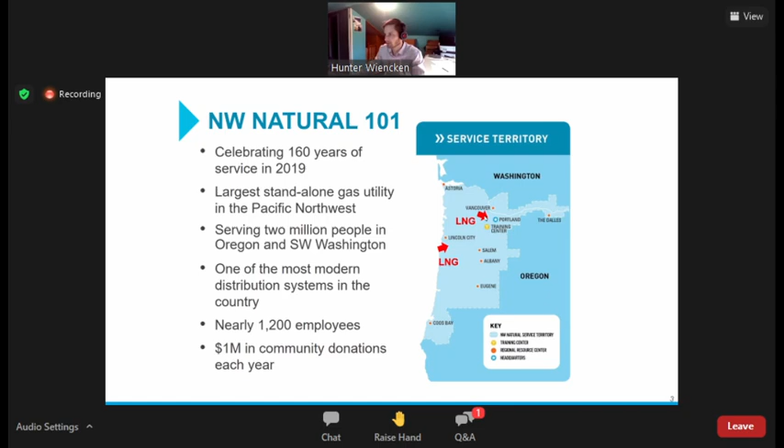We then added another LNG plant in 1977, in Newport, like I mentioned. It's a larger plant. It was newer, obviously, so it's a little more advanced. This facility was actually originally meant to import LNG, but that never came to fruition. I think there was an issue with getting ship traffic to the site. Nevertheless, it was built there, and we use both the sites today.

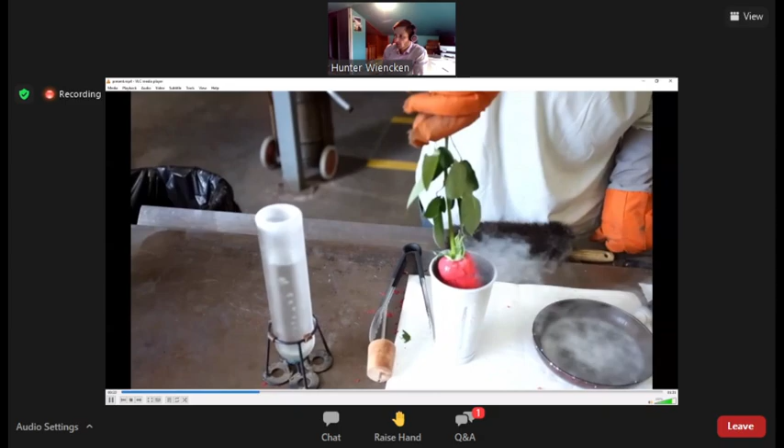Here's an operator at Newport LNG, and he's just gonna show you how this is not as cold as liquid nitrogen. I think probably in your science class you may have had someone show you what liquid nitrogen does when you freeze stuff, but nevertheless, negative 260 degrees is still pretty cold, and you can quickly take a rose and freeze it and shatter it.

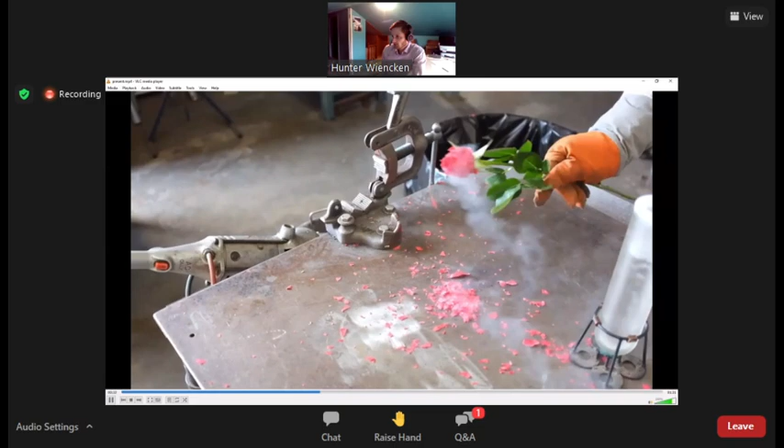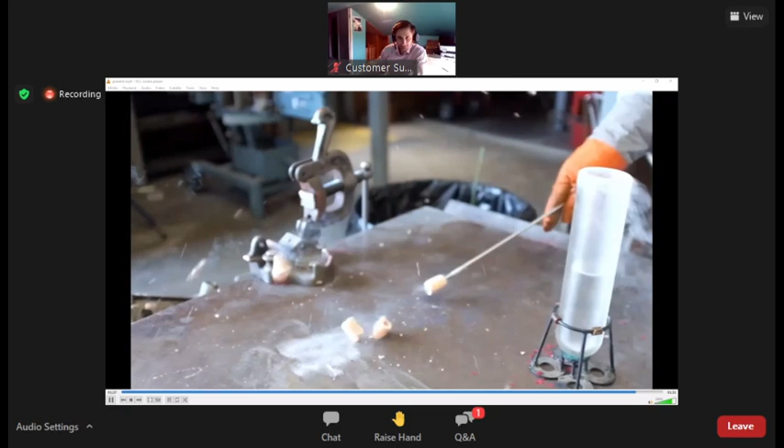We'll do a hot dog for funsies here. And so you know how when you boil water to make tea, what's happening here is once you put that hot dog in the LNG, it's actually boiling. It just has a much lower boiling point than water, and so there you go.

So why do we have natural gas or LNG as a utility? So Puget Sound Energy, they're providing natural gas to fuel vessels. And if you've paid attention to political news, there's been talk of LNG down in Southern Oregon on the coast, and that's actually to export LNG. But so we're a utility, and just any guesses on why a utility has LNG?

I don't know if this works. Can they message through? So you guys, let me see if I can turn this on for you. All right, I just turned on the chat for you guys. So if you want to put in some words in the chat, if you want to ask your question again.

Yeah, so why do you think Northwest Natural has LNG sites? Any guesses? Thoughts? Okay, no thoughts. Well, so think about what happened in Texas recently. Oh, I think we have some coming in. I think they were typing. There you go. Do you see the chat? Yeah. This is great.

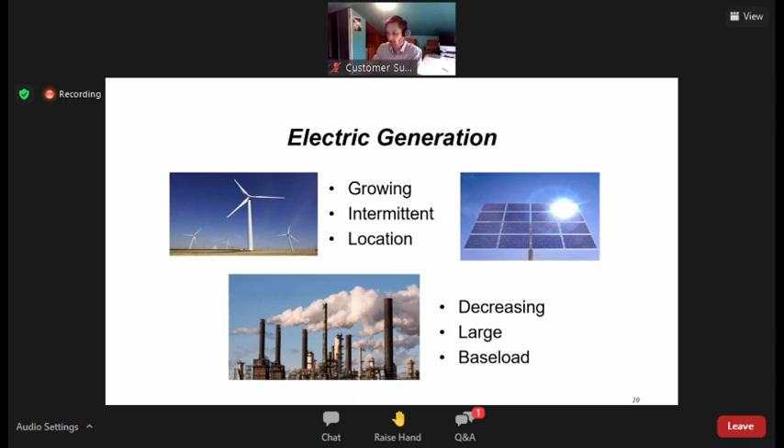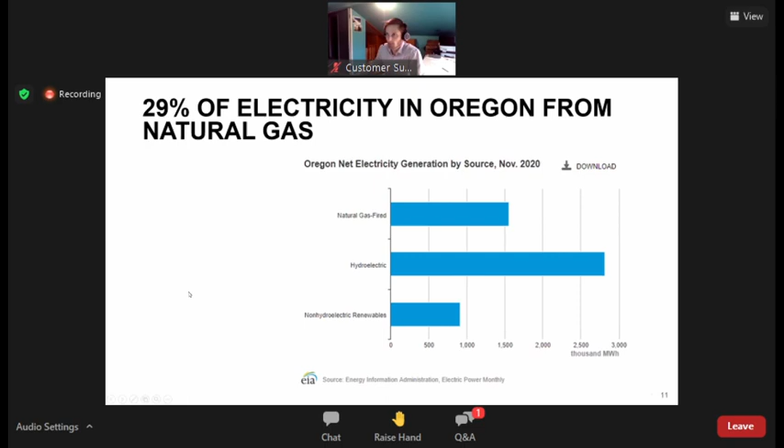And now we're sort of allowing the demand to ebb and flow based on wind and solar and hydroelectricity. And then we just ramp up and ramp down the natural gas to fill a gap. And as a whole, we end up producing a lot less emissions. And in the state of Oregon, I think they've closed any last coal plant at this point. So I don't think a lot of people realize it, but in Oregon, like I said, 30% of electricity is coming from natural gas. So that's why it's important.

Oh, do I get a Q&A? Let me find the right button. Oh, did I miss that question? Oh, for what job? For my job? I'm assuming.

Well, I'm a mechanical engineer. I went to Washington State University and learned engineering, and then went into consulting and learned how to build all this stuff. And so you need the technical skills in engineering, and then you need a lot of general engineering skills, which I'm going to show you in a minute.

So hold that thought. Outside of engineering, which I didn't plan to talk about, a big area is communication: writing well, speaking, putting presentations together. That's very important. And if you get opportunities in school to practice that, I highly recommend it. So that's my quickie on it.

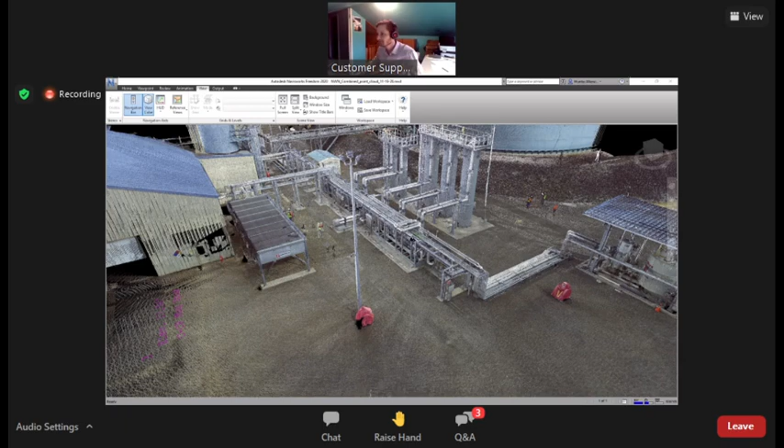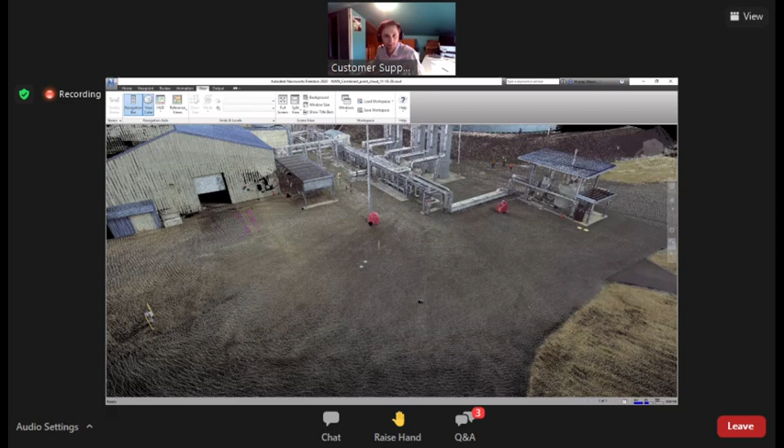So if you can chat still, if it's allowed, I'd like to see some guessing. While you ponder, I'm gonna bring up a little view here. All right. Oh, the question was, let me think how to frame the question clearly.

So ultimately, LNG is this liquid at negative 260 degrees. And before that, it's gas. And we need to clean the gas and remove certain components before we go down to negative 260 degrees. Why do you think we're doing that? What do you think we're removing? Why do we need to change the gas before we liquefy it?

Okay, so let me scroll up. No discrepancies in it, kind of, yeah. Is easier to treat as a gas than a liquid. Yeah, that's kind of true. Some of the things in the gas could potentially harden, some particles, exactly, Mackenzie. It's still going to be flammable.

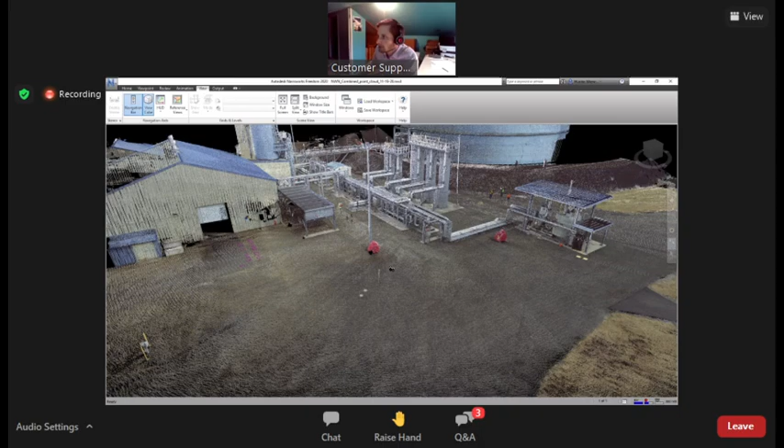Yeah, and particles that we want to get out of there. So I think, Mackenzie, you were the closest. The main thing we want to remove, okay, and so by the way, we're over at a corner of the facility. I got a scan. Unfortunately, my contractor didn't get me the entire plant for you guys.

But this, can you see the little hands? Can you just nod? I forgot your name. Anyways, so

Gas comes in and yeah, so we want to remove things. So we're going down to negative 260 degrees. So we want to remove whatever's going to not be a liquid. And so that would be water, which is obviously going to turn into a solid at 32F, and CO2 is another contaminant that's often in natural gas, particularly if it's coming from the Rockies. And CO2 wants to, I think, turn into a solid at negative 150. You know, like when you buy dry ice at Freddy's or whoever your grocery store is.

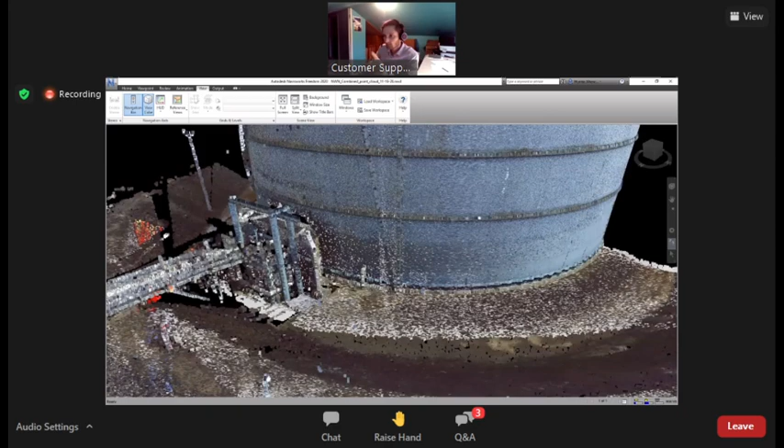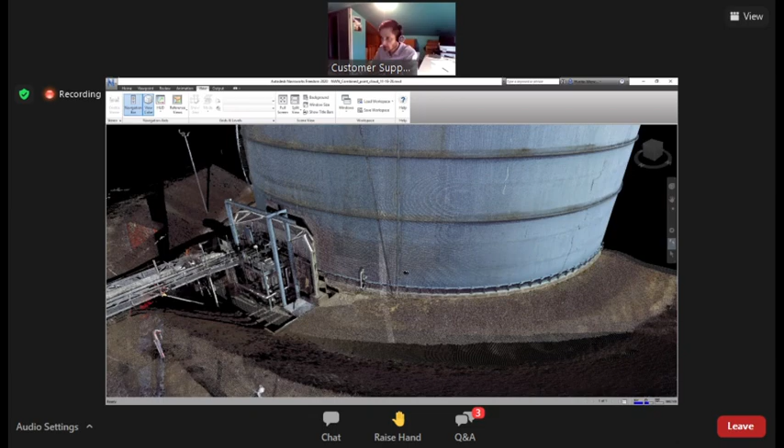So we want to get those items out, because if we try and turn it into a liquid with water and CO2 in there, the system can't run. It freezes up. All those particles get stuck all over our exchangers. And furthermore, this whole huge tank over here, they all pile up in the bottom of the tank because everything in here is negative 260 degrees. So if there's water and CO2 in there, it sits in there forever. So we want to try and get all that junk out of there.

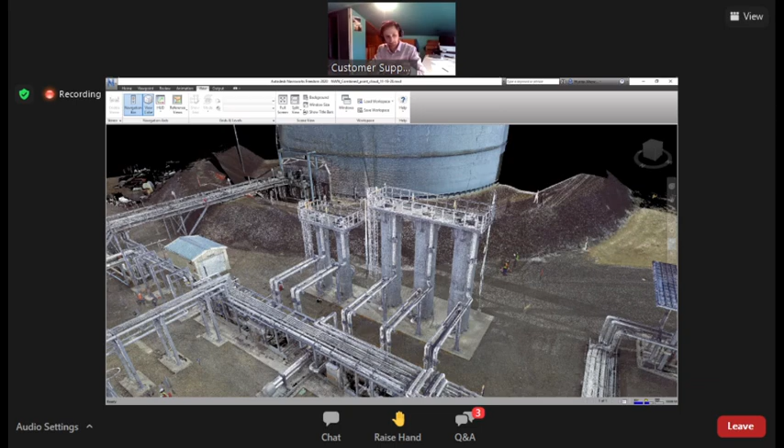And how we do it is we got two processes. We got these exchangers on the left and these vessels on the right. And the first ones are used to remove CO2. And how it works, if you've ever seen, well, I'm sure you've seen it. You know, if you got a shoe box and you get the little packet and it says like, poison, do not eat, that's got desiccant in it. That's got these little balls in it. And they put it in there to pick up moisture so your shoes are fresh and clean when you get them, and so it keeps the humidity down in that little box.

Well, these vessels, and that's called molecular sieve, these vessels are completely full of that stuff that you find in that little packet, 30, 40 feet tall. And each of those little balls, these little ceramic balls, are meant to pick up the water or the CO2, and they're specially formulated so those CO2 molecules fit just right in the little nooks and crannies of that ball and get caught. And so as gas flows in, this gets filled with CO2, and then clean gas flows out, and then it goes into the next vessel, and then that gets filled with water, and then that goes out, and then you got clean gas, and it goes over to the liquefier.

Okay, so now one more question. If you want to answer, I'll pause a second. How do you think we get the CO2 and the water out of these vessels once it's all full? We got CO2 in one, we got water in one, clean it out of the gas. How do we get that stuff out of there now? Any ideas? Because we can't just keep filling it indefinitely, right? Okay, Mackenzie, you did pretty good. What do you think? Right on.

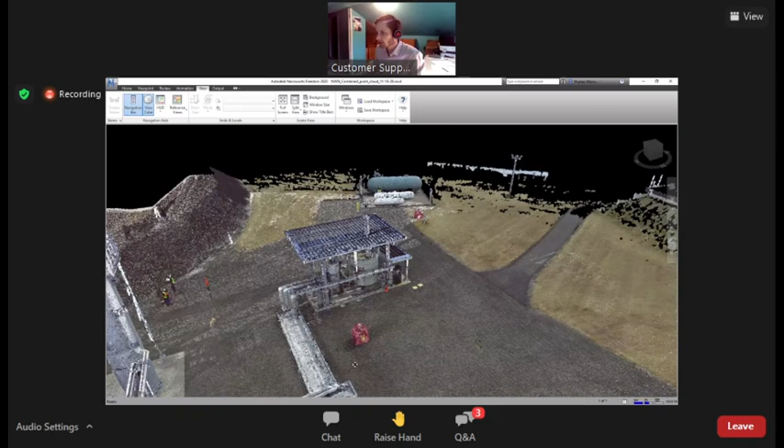And I realize I'm at 25 minutes if someone's worrying about time.

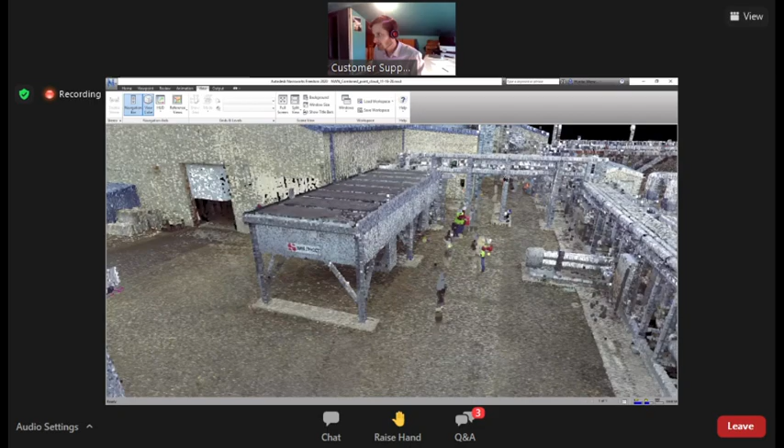This thing you see over here, it heats up hot oil to 600 degrees. That hot oil goes over here to some heat exchangers. And then we take gas, run it through the heat exchanger. The gas goes up to 600 degrees. And then we take that gas and we run it through one of those vessels once it's full. And then those little beads release the CO2 and the water. It all gets released. It's flowing out of there.

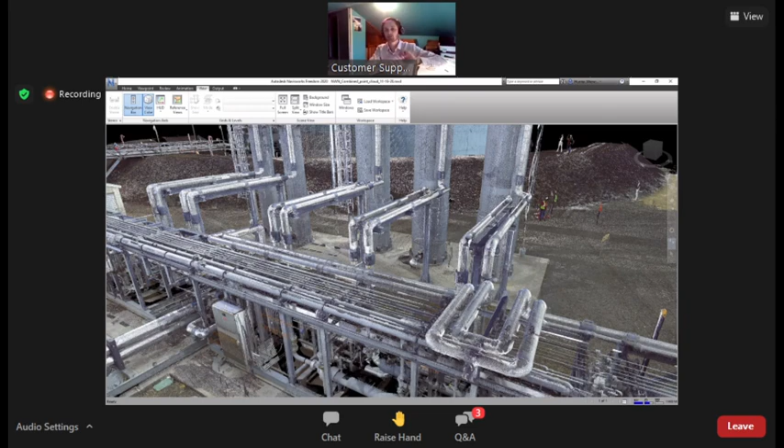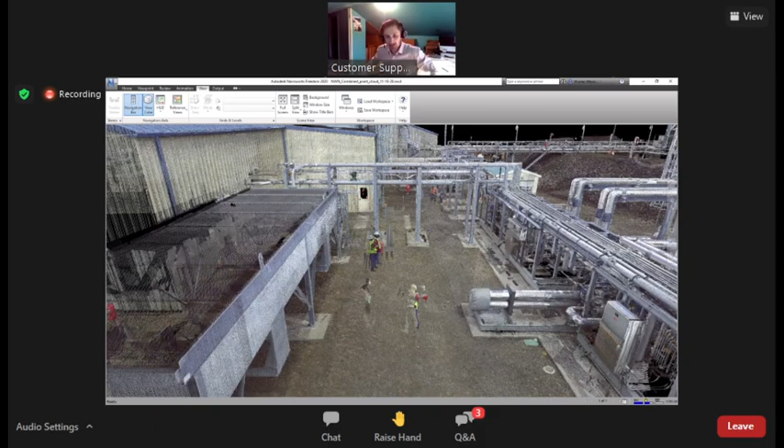And then we actually use that CO2 and water that's now being carried with natural gas, and we burn it in a turbine on site, exact same technology that they use to make electricity, but we use all that energy to run a liquefier, which I wish I had the scan from the contractor, but so we heat up the gas, run it through these vessels, everything gets released, we burn the gas, creating not electricity in our case, but compression, which I'll explain what that's for in a second.

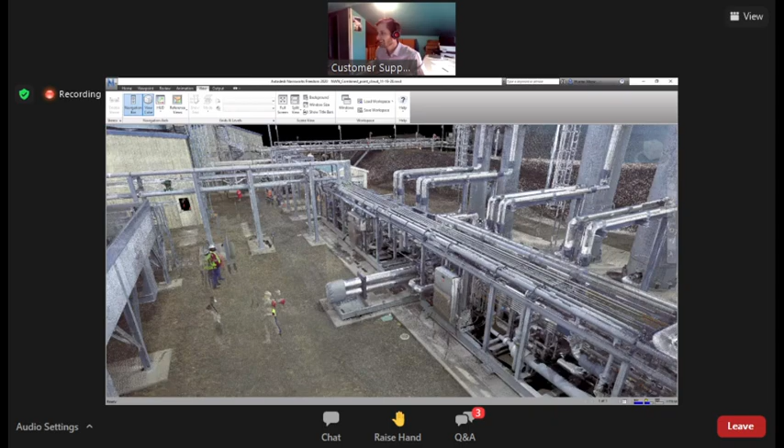And after we do that, running the gas through these vessels hot, we then cool it down and they're ready to go, ready to absorb more CO2 and more water and repeat the process. And that's why we got two. We can have one regenerating and we can have one absorbing. And we have three of these other guys for CO2 because we have 3 steps: absorbing, regenerating, and cooling.

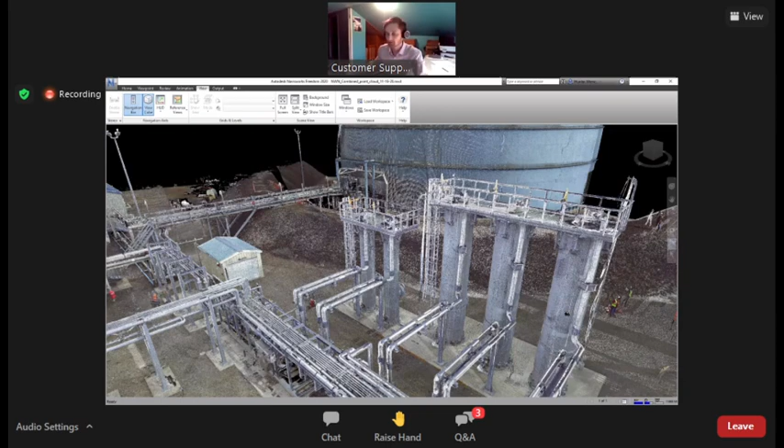Okay, that was fun. Maybe fun for me, I don't know.

This is what the process flow diagram looks like. Don't know that I really want to get into it too much, but this is where that gas flows in. This green box is where all those vessels were. Some really good guesses on how that worked, quite impressive. And then the gas leaves all this rigmarole, flows over here, and it goes through some heat exchangers.

Don't really have a good way to show you this because it's like 30 feet tall, can't exactly take a photo of it. But these little squares here, they're like a radiator, same kind of construction as the radiator on a car. That aluminum thin material with passes going through it. So the gas goes in one side and gas goes in another side, and it heats and exchanges, and eventually comes out at negative 260 degrees and goes in the tank.

That compression I mentioned is going on over here. And so all that waste from all this stuff is going over here. It's running a turbine, which then compresses refrigerant and creates a cooling effect, just like the AC in your house, if you have AC in your house or your car.

So that's all I had for the process, which, Olivia, hopefully that's not too much of a bummer for you. But hopefully it's better than Puget Sound.

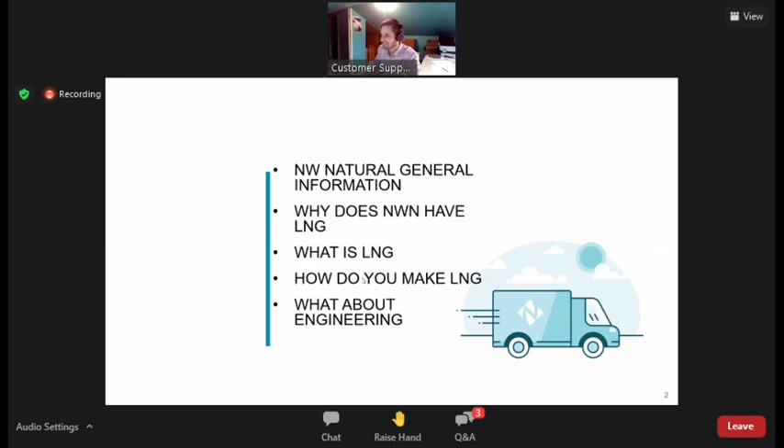So how am I on time? When's the normal wrap up? Do you know? It was scheduled for an hour on our side, so right now we're about 35 minutes in. Okay, they told me to keep it to 20 minutes or something before, so okay. I'm failing at that, but I won't take an hour. How about this? Everyone who's listening in, raise your hand if you have 15 more minutes at least. You'll have an audience of 3 in 15 minutes.

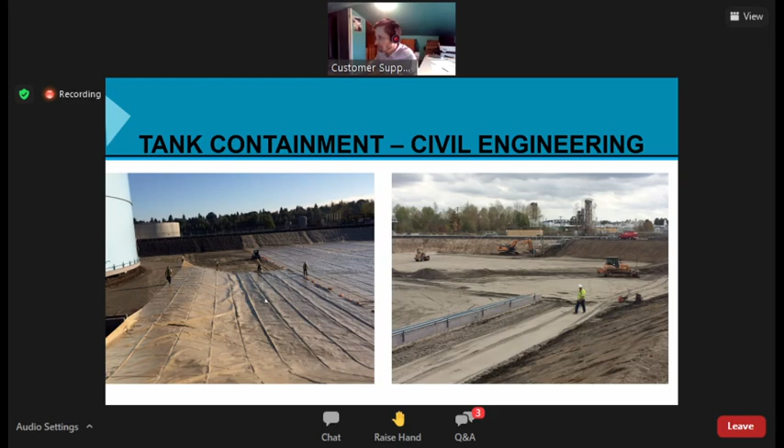Okay. I'll punch through. So geotechnical, so this is the study of the rock and what the ground's made out of. This is a project at Newport where we needed to put new equipment in, and the ground there is sand. So over time, engineering-wise we have to build things to the current seismic code, which is meant for the big one, the big earthquake.

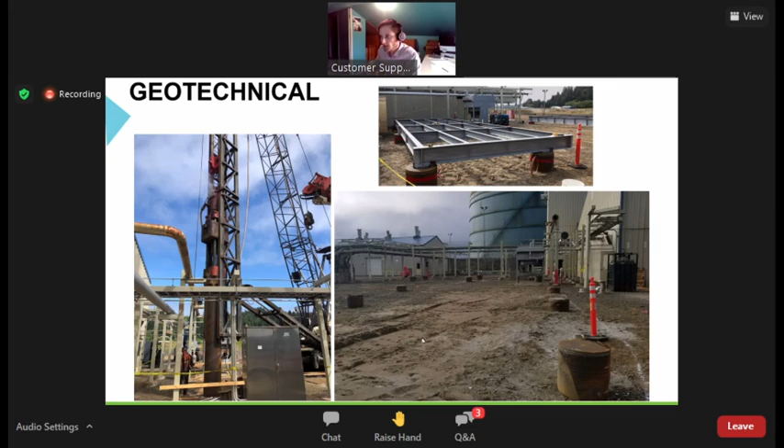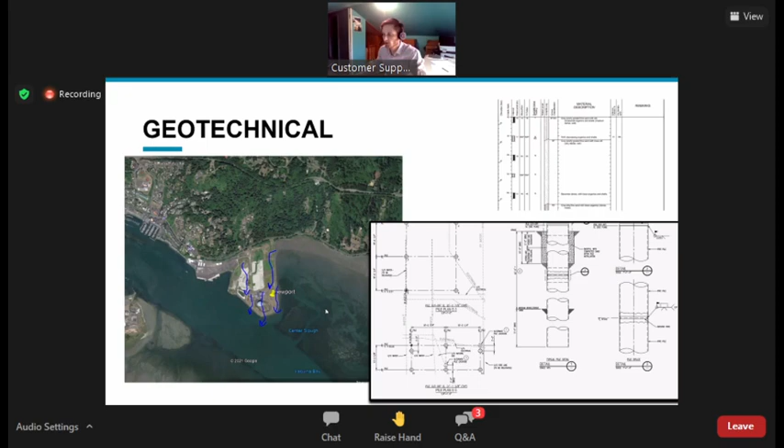And now that amount of energy in an earthquake would actually cause all the ground underneath the site to slide away. So if there was an earthquake that met that design, the soil would actually liquefy and turn into little bubbles or balls and slide away. So our geotech came up with one of their solutions, which is to put driven piles down to bedrock to hold up the new equipment. So that's a geotechnical project example.

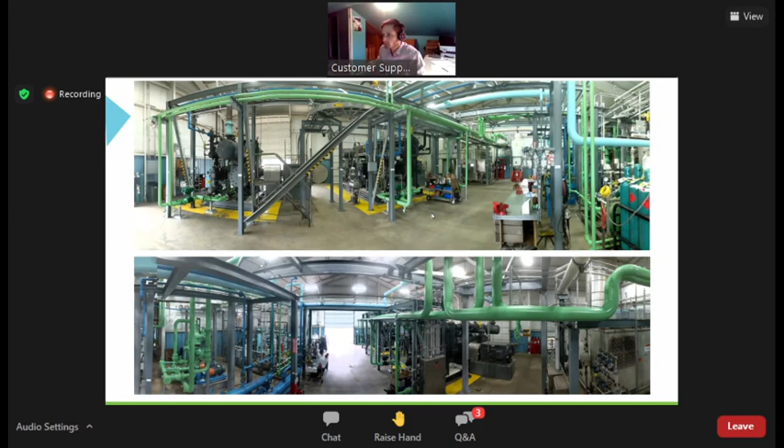Mechanical engineering, we have projects that include a lot of piping, and piping can get very complicated, particularly when it's at hundreds and hundreds of degrees. And here's another photo of, in this case, we put in new glycol piping. All this glycol piping runs all the equipment to keep it cool by using heat exchangers that are outside and run air through them. So just the normal air cools the glycol, kind of like with the radiator on your car, and then keeps all these pieces of rotating equipment happy.

Electrical engineering, you've got all sorts of power users on site, and this was a recent project we did which provides emergency backup power generation, so we can run the critical equipment on site, and it uses natural gas, so we have like an infinite supply.

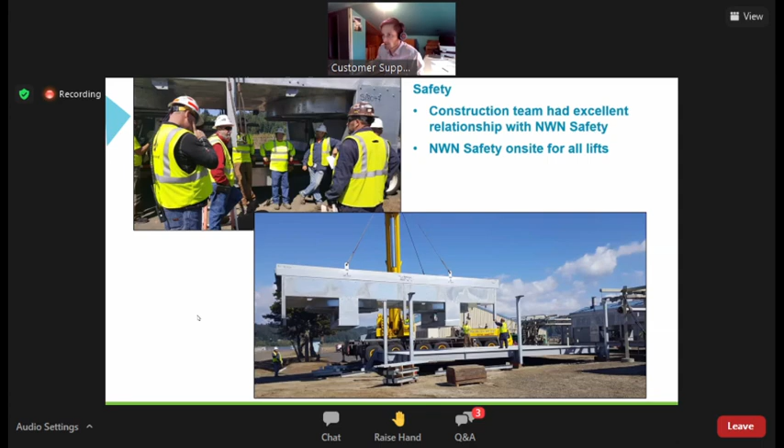And I think no matter what discipline in engineering you go into, you have to go into projects with the safety of the guys who are building these things in mind, and always keep that in your mind for how to construct it and how to operate it long term. And this is an example where we all get together and we talk about what we're going to do before we pick up a several ton piece of equipment and fly it around on a crane, just to make sure we're safe. And that's it that I had.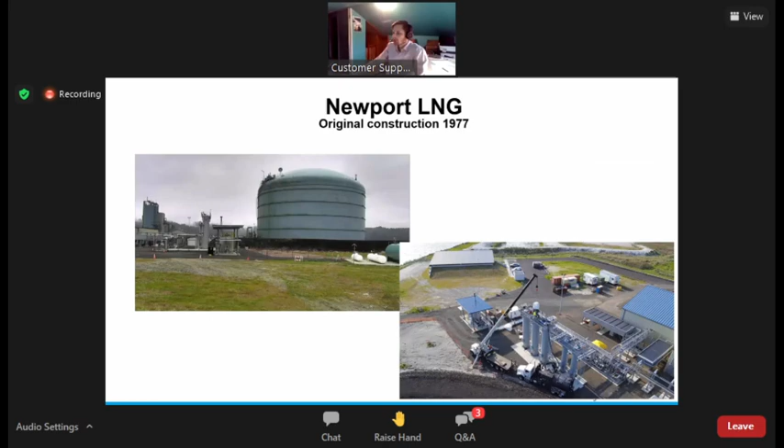And then additionally, I kind of cut it off, but over here to the right, the Rockies, Colorado, I think even further over is a lot of the other production. And so that's where it's coming from. Otherwise, there's no production in Oregon, Washington, maybe a smidge in Idaho, maybe a little bit in Montana, but most of it's coming from quite a ways away. Now I was going to show another.